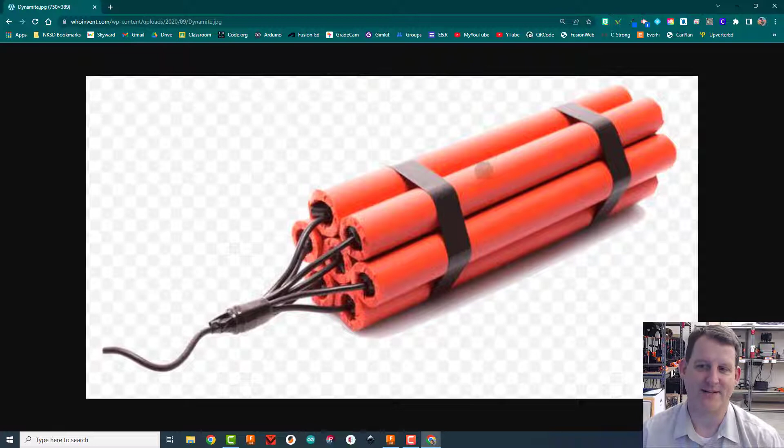So we're going to make 7 sticks of dynamite. We're going to put some fuses on them. We're going to put some straps on them. And then we're actually going to write the word TNT or dynamite or something here in the middle. But that's kind of what we're looking for to do. Let's get down to it. There's lots of interesting things on this one to work with on Fusion.

So first thing I'm going to do is save my file. I'm going to save this into my 3D printed projects location. You choose your own location, but keep your stuff organized. I'm going to call it Dynamite, and I'm going to call mine video version. That way I know which one I use for the video. You don't need to call yours that. I'm going to click save.

If you want to change the location, you can click this down arrow here. You can create a new project or a new folder, and then you can save it into that project or folder. Keep your stuff organized. As you build up more and more things, it'll get confusing pretty fast.

All right, so next thing I'm going to do is, let me show you the picture again. We're going to create the sticks of dynamite first. So we're going to create 7 circles, line them all up, and then extrude out those sticks of dynamite.

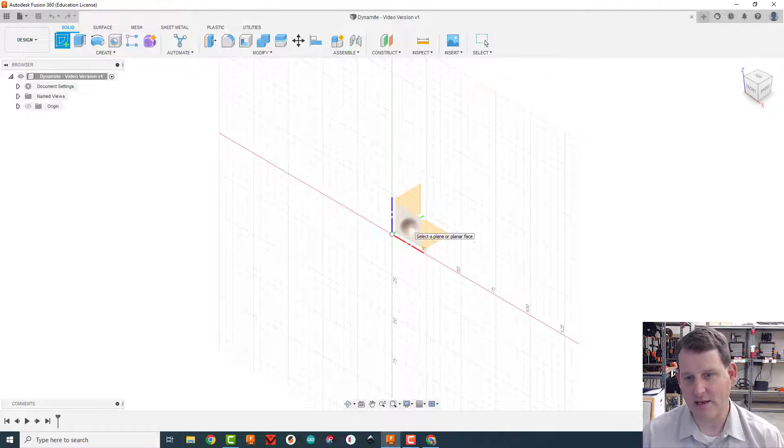To do that, I'm going to choose to create a sketch. I'm going to create it on the front plane of my sketch, and I'm going to add a circle to the middle of the sketch. I like to always anchor my sketches to the center of the grid. That way they don't move around as much, they're easier to work with.

Next thing I'm going to do is grab another circle, drag it out, and put in 15, enter. Now one thing that's nice to do is if I double click on this 15, it'll let me edit it. And instead of typing 15, I can just click on this one right here. It'll put a D1 in there. Just click once and then hit enter. And now this one says FX diameter 15. That means that it's set to this one.

So watch what happens. If I come in and change this one, double click on it, and change it to 25, they change together. So this second circle is getting its measurement from this first circle. Click back on it and go 15.

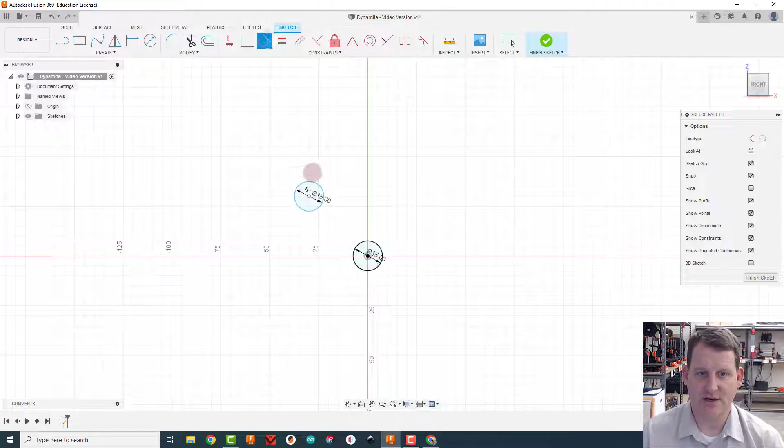And now I want these lined up next to each other, so I'm going to do tangent. Remember, tangent is how we get things to touch circles really nicely. So this circle and this outside circle, and now they're touching. And one thing I notice about this, I could go ahead and make 6 other circles going around this way.

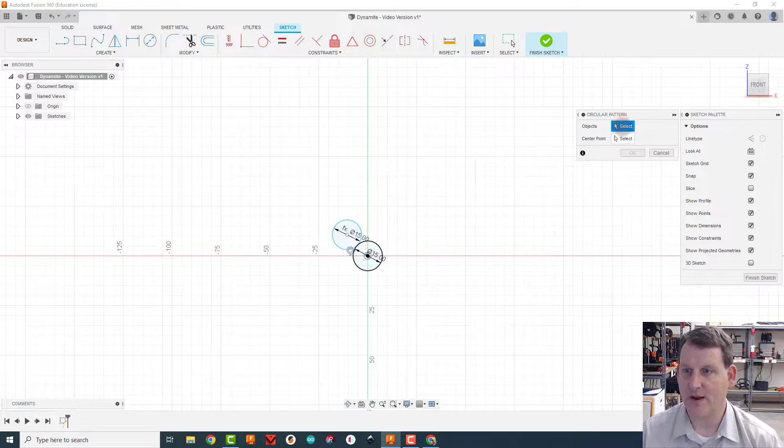But I notice also that these circles are in a circular pattern around the centerpiece of dynamite. So once I notice that, my life gets a little easier. I can come here to create circular pattern. The object that I want to create a pattern with is this outside circle, and the center point for the pattern is the inside of the center circle. And now I can just up the quantity to 6 and then click OK.

I could also draw 15mm circles all around the outside and then make them all tangent and do that as well. All right, one really cool thing, because we linked these two together and then patterned all of these, if I come in here and change this to 20, they all get bigger perfectly together. So that's a pretty cool thing to do. Back to 15.

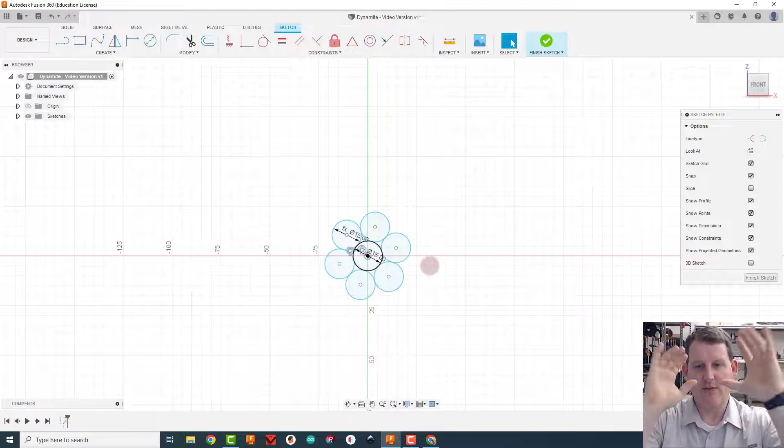Okay, so the last thing I want to do is fix how they're sitting kind of wonky right now. I want those bottom 2 sticks of dynamite to be on the bottom, not at a weird angle like this. To fix that, I'm going to do something kind of weird: grab a construction line and connect these bottom 2 sticks of dynamite with it. Hit escape to leave the tool. Now notice if I can make this thing horizontal, they'd be lined up perfectly with each other.

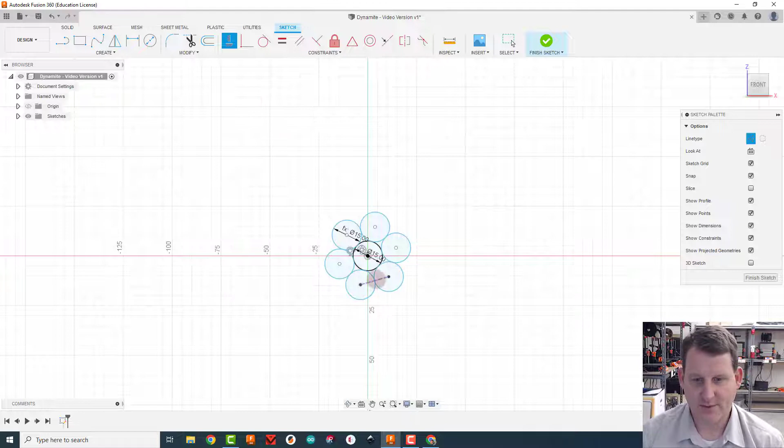To do that, I've got this really cool constraint called the horizontal vertical constraint. What this does is the next line you click on, if it's closer to being horizontal, it makes it horizontal; if it's closer to being vertical-ish, it makes it vertical. This one, when I click on it, because it's already close to horizontal, shifts it down to make it perfectly horizontal. Now my sketch is locked in—everything is black, it's fully constrained.

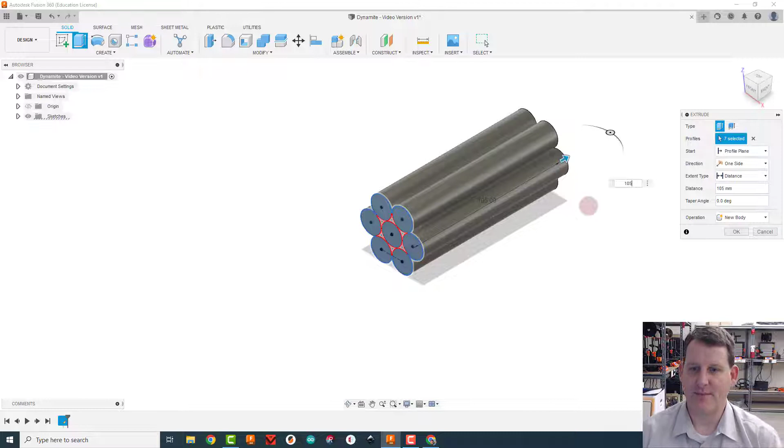Let's extrude. Hit E for extrude, and we're going to kick them out the back. Oh, perfect, just drag this out. I want it to be 7 times longer than it is wide—that's the dimension of dynamite. So that means 105: 7 times 15 is 105 millimeters. Hit enter. There's our sticks of dynamite.

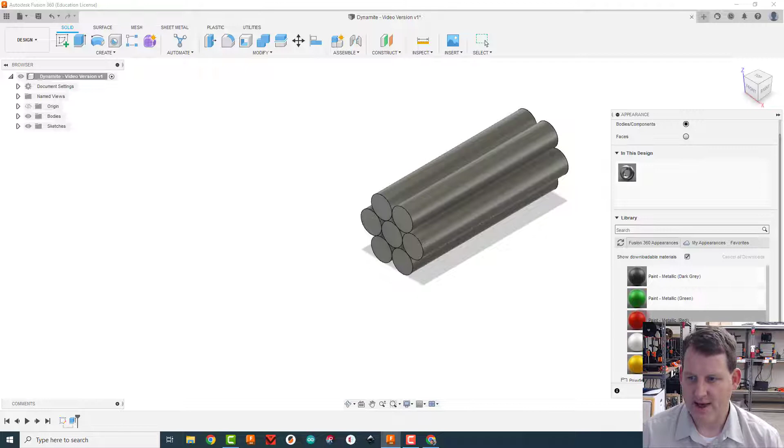I'm going to push the A button to bring up the Appearance tab. Let me show you where I am because I'm already deep into it. Underneath this list there's a paint one—I'll come down here to paint and click on metallic. I like that look, but choose whatever you'd like. I'm going to grab this red and just drop it right on the dynamite. Awesome, now I've got something that's dynamite looking.

If there's a little download button over here, you have to download it first—just click on it, give it a few seconds, it'll download and add it to your model. I'm going to close this, and then in my bodies folder I'm going to change this body and call it Dynamite, that way I can keep track of what everything is.

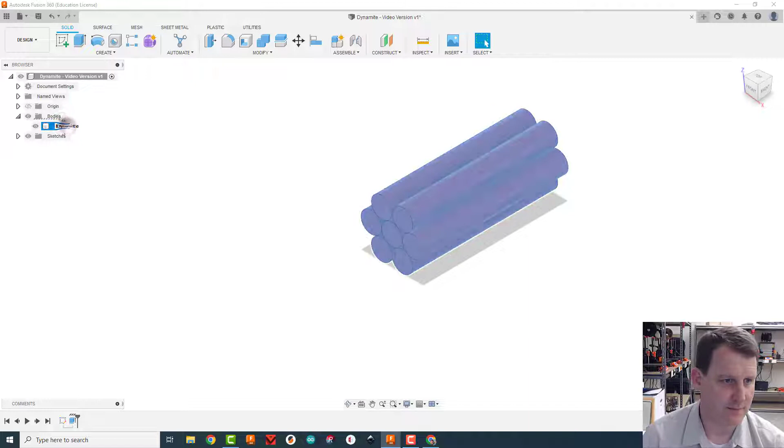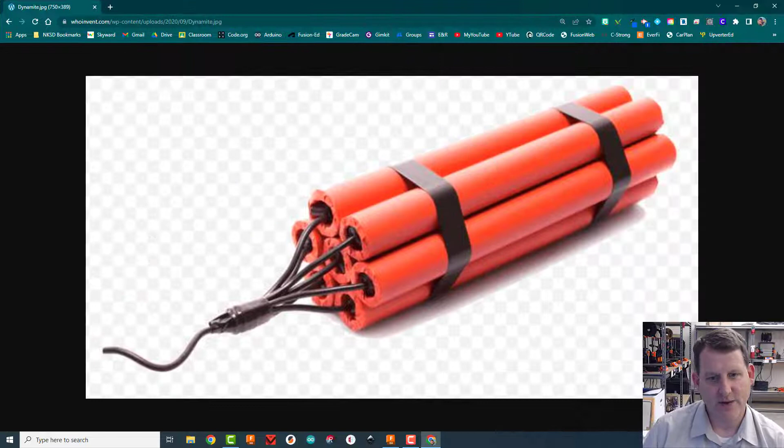Okay, so there's my Dynamite, got it going. Next thing we need to do—let me show you the picture again—is create little cutouts here on all the Dynamite for the blasting cap to go into. So let's do that next.

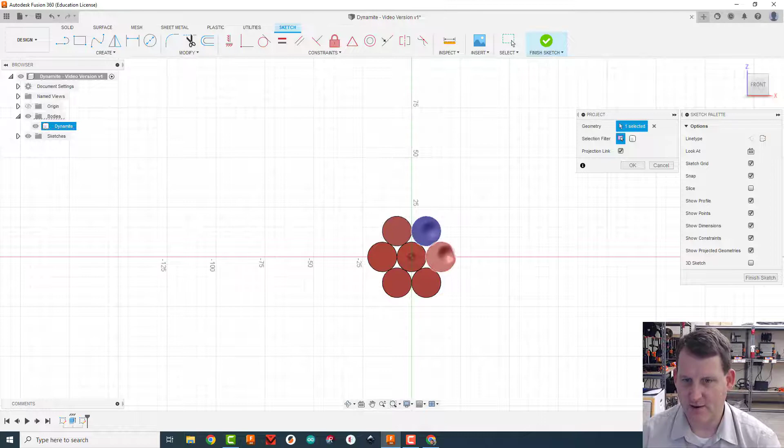To do that, I'm going to create a sketch on one of these circles. If I hide the Dynamite, you can see I only really have one of the circles drawn on my sketch, so turn the Dynamite back on. I'm going to do P for project and click on all these other circles so that I have them on my sketch, then click OK. Now when I hide the Dynamite, I can see all the circles that I need to see.

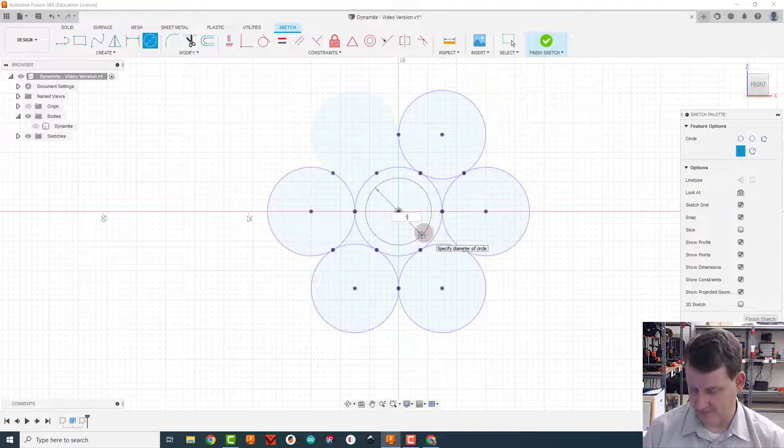Next I'm going to grab a circle tool, go to my center circle and drag it out. I want the outside to be 15, so I'll make this one 11. Perfect. Then I'll grab another circle, come up to this top one, find the center, drag it out and set it to 11. I'll double click on it, click once on this distance, and hit enter—now these two are stuck together as well. So if I want to change this to 12 later because it doesn't look right, I can easily change it.

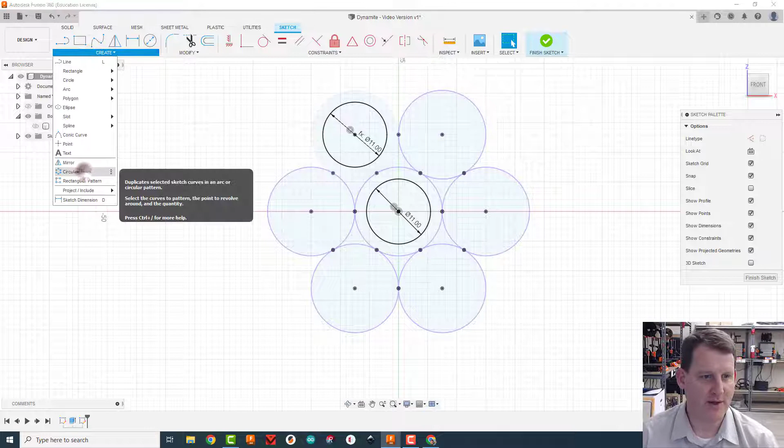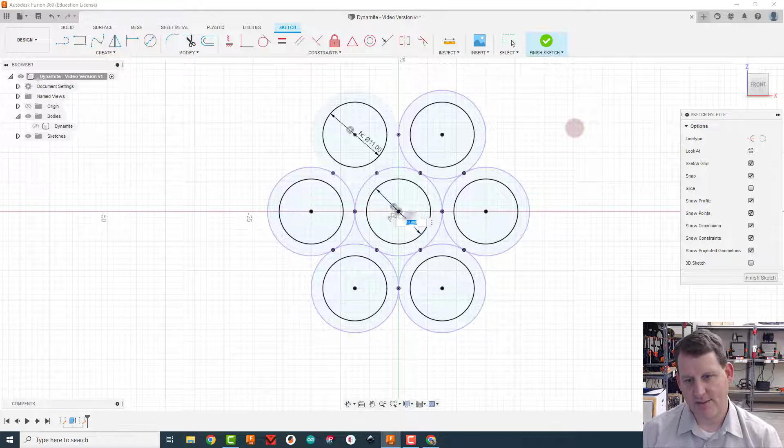Now I'm going to go to the create menu and do that circular pattern thing again. I could go around making a circle in each one of these, but this way is going to be a little faster, I think. So I'm going to pattern this circle around this center point here, and you can see I've got 3, 4, 5, 6—click OK. Awesome. You know what, I think I'm going to do 12.

Yeah, I think that's better looking instead of 11. And notice when I change this one that all of them change, which is kind of really cool.

I'm going to finish this sketch now. I'm going to turn my Dynamite back on, and kick it over to the edge so I can see what's going on. Then I'm going to extrude this.

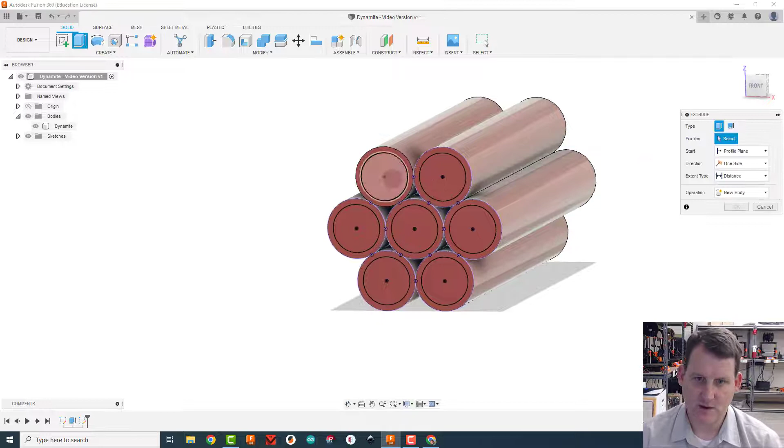So I'm extruding all of these inside circles, back 4 millimeters. So negative 4 - that's deeper than I really want, but I'm going to cut a little extra deep so I can put the blasting cap in there as well.

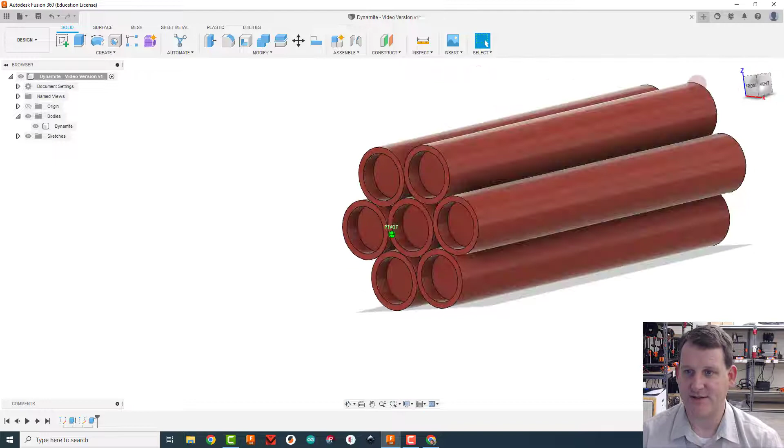We're going to make blasting caps for them. Click OK. Now I've got the little indents on this side. I need to get them on the other side over here. Now, I could do all that work over again.

It's a great way, if you want to do it that way, yay for you. But I'll show you a neat technique to make it faster. So what I really want to do is just mirror these exact same things on the other side.

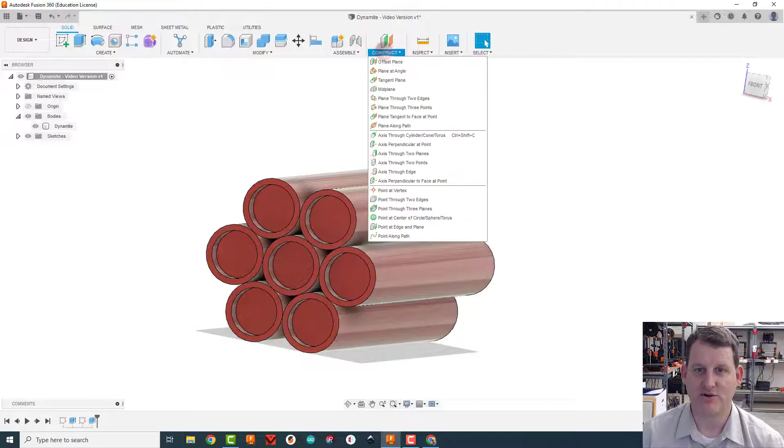But before I mirror it, I need to have the halfway point marked. To mark the halfway point of the Dynamite, I need to do a construction, then midplane. It's asking me which two planes we want to be in the middle of. I want something right in the middle of this face and the back face - doesn't matter which one I click on.

So it just drew this plane right in the middle of the Dynamite. I'm going to say okay, great, and click all right. Now move back to the home view real quick.

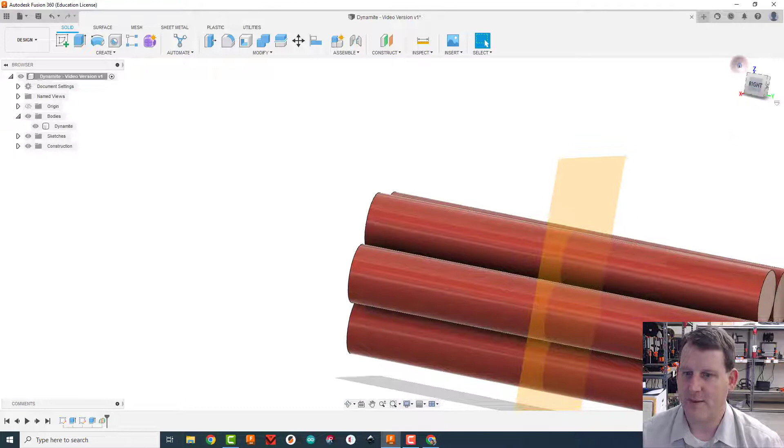Now I'm going to do this cool thing called mirror. I'm going to come over here to the Create menu and click on mirror. What I want to mirror here is not the whole body - that would be like creating another whole stick of Dynamite. I just want to mirror a feature of it, which are these holes in the front.

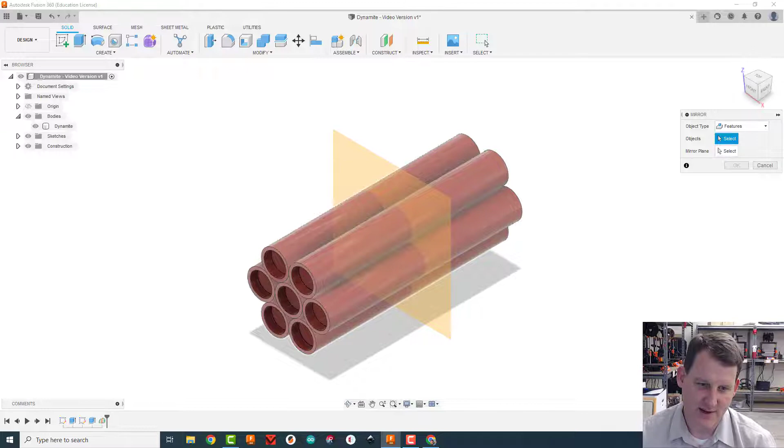So over here, I'm going to click on these holes. Oh, it's so hard to click sometimes - right there you can do. If you're having a hard time clicking it, just hold your left mouse down. Oh, maybe not, that usually works - it's not working on this one. So keep going until you find that hole, those right there.

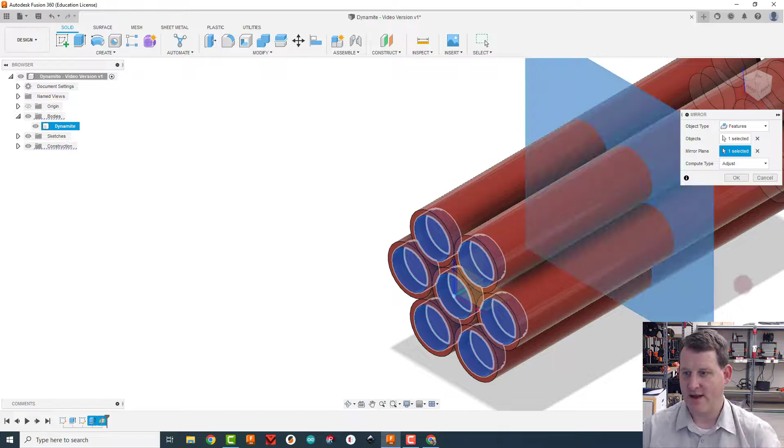Boom, just like that. And then the plane that you're mirroring around is this middle one. You can see right away what it's doing - it's just mirrored those cuts over to the other side. Click OK.

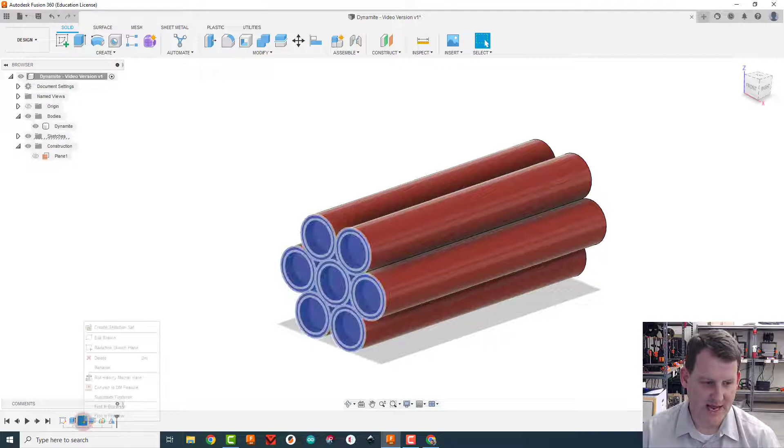How cool is that? Now, one of the really nice things about this as well is because I've just mirrored them, I'm going to come over here to the construction folder first and turn off the midplane. Because I did them with the mirror command, if I go in and change this original sketch right here - I go edit sketch and I'm like, okay, now I really want this to be 13.

And I hit enter, and I finish sketch - don't do this, just take a look at how it works. It automatically goes and fixes all of that as well, like everything gets mirrored the same all the way across.

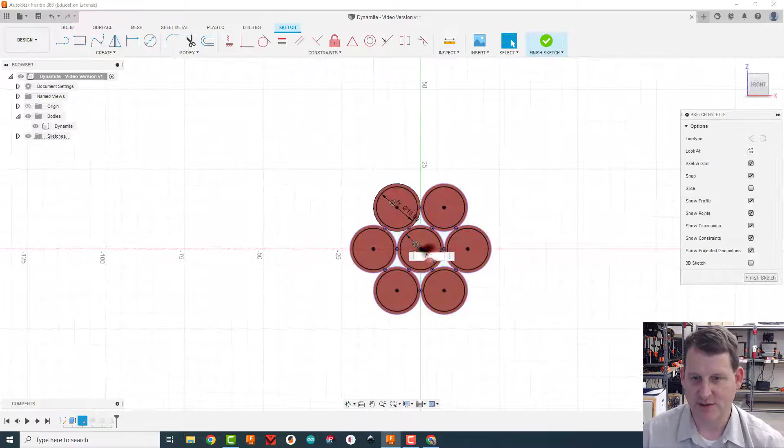So that's pretty cool. I'm going to right click, edit sketch, and change this back to 12. Again, all of these change, and because all of those change, the mirror changes all the ones on the back side. So yeah, really cool.

Okay, I think that's it for this lesson. Next lesson, we're going to build straps for the outside, and we're going to write TNT on it - that will be a really fun thing to do. All right, see you soon.